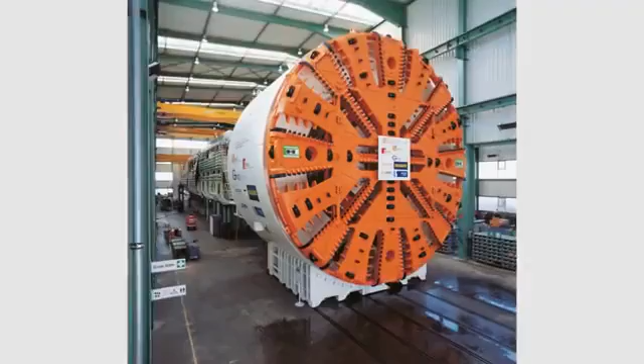The following computer animation shows the way earth pressure balance shields work, taking as an example the Herrenknecht EPB shield used for a subway construction project in Barcelona.

As part of the extension of Subway Line 9, the machine S442 excavates a 3.6-kilometer-long section between the subway stations Gornal and Zona Universitaria.

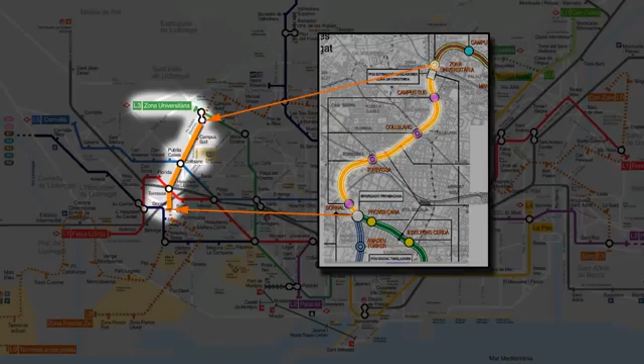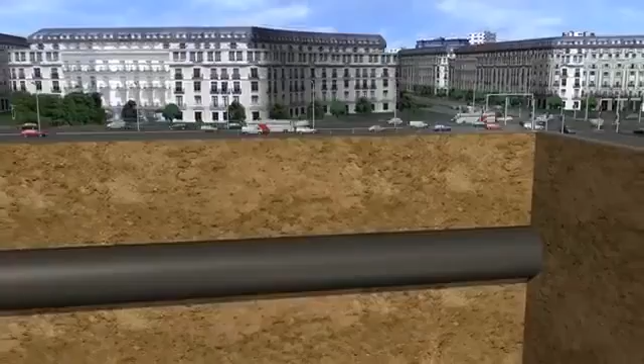The tunnel route crosses beneath Barcelona's historic city center, densely populated residential areas, and roads. In order to avoid any damage to the sensitive buildings, subsidence, heave, and vibrations must be avoided at all costs. In addition, the impact on traffic above ground must remain as small as possible.

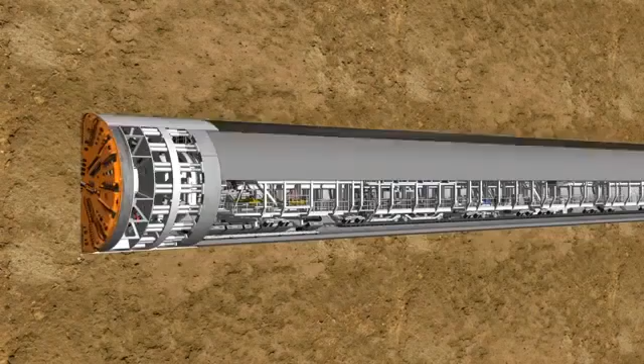The S442 is a classic EPB machine with an outer diameter of 12.06 meters and a total length of 95 meters.

With its rotating cutting wheel, the tunneling machine breaks the material from the tunnel face. The material is then transferred to the belt conveyor system in the rear of the shield via a screw conveyor, while the hydraulic cylinders press the machine forward continuously.

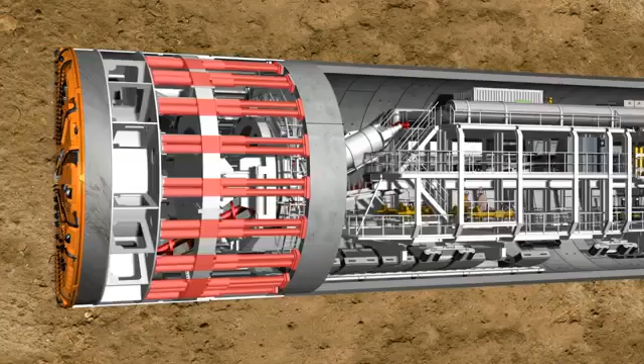The reinforced concrete segments, known as lining segments, are installed under the protection of the shield skin. When the ring building has been completed, the machine can push itself against the new tunnel ring and drill further into the soil.

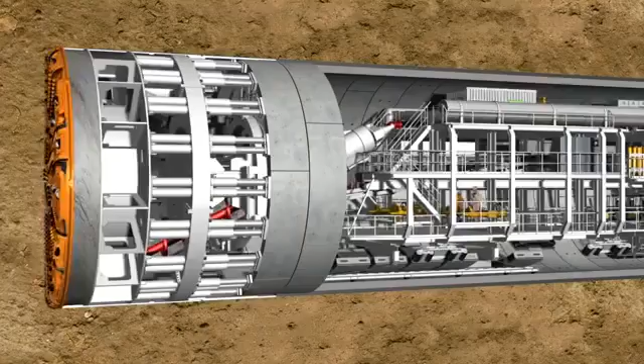The 83-meter-long backup accommodates all logistic facilities necessary for the operation of the overall system.

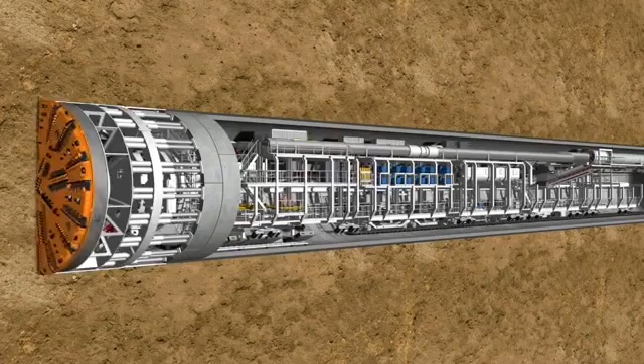The working method of an EPB shield is basically made up of two phases: the tunneling phase and the ring building phase.

During the tunneling phase, the cutting wheel, which rotates at a speed of up to 2.7 revolutions per minute, is pressed against the tunnel face with a pressure of up to 400 bar by means of hydraulic cylinders.

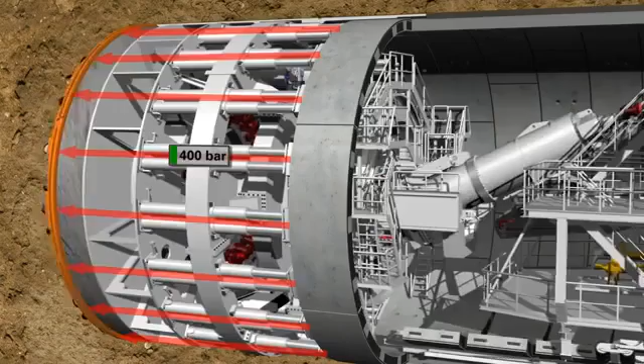24 hydraulic motors drive the cutting wheel via a gear rim, developing a drilling torque of up to 38,000 kilonewton meters.

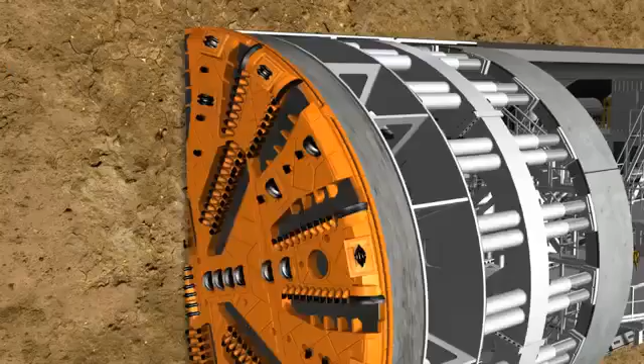Under this high pressure, the disc cutters and cutting knives made of high-strength steel loosen the material at the tunnel face.

If necessary, the soil can be conditioned with water, bentonite, or foam using the injection systems located on the backup.

With the help of nozzles integrated into the cutting wheel, the corresponding conditioning medium is injected into the soil, which is pressed into the excavation chamber by the existing earth and groundwater pressure.

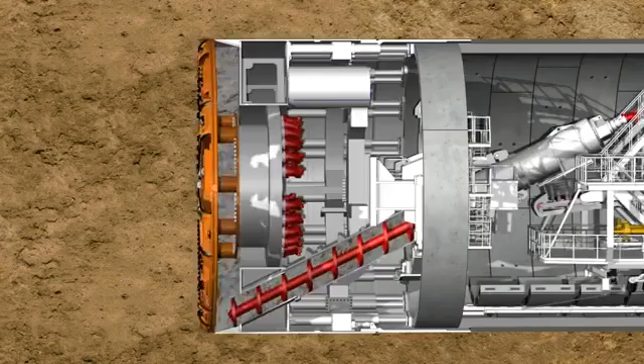For shield tunneling in non-stable soils, a loss in stability at the tunnel face is compensated by creating a support pressure. In the case of the earth pressure balance shield, the soil which was excavated by the cutting wheel is used to support the tunnel face.

In order to reach a state of equilibrium, the support pressure is transferred by the hydraulic cylinders via the bulkhead to the soil, which avoids an uncontrolled penetration.

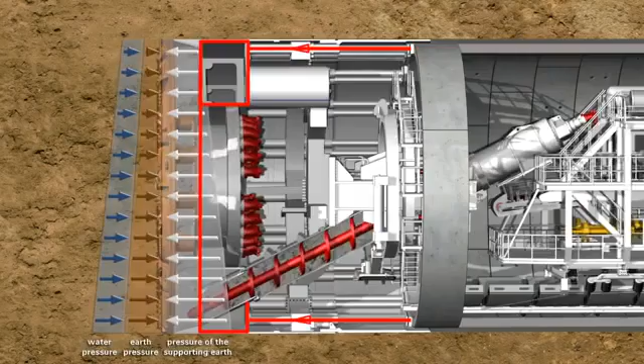The soil prepared in this way can now be transported from the invert area of the excavation chamber to a belt conveyor by a screw conveyor.

The screw conveyor is driven by two hydraulic motors which have a power of up to 400 kilowatts.

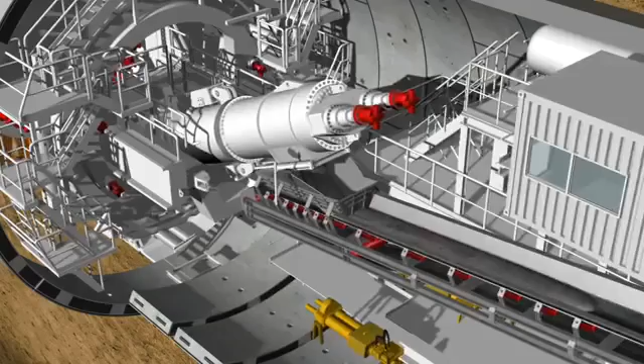The quantity of the soil taken from the excavation chamber is regulated by the screw conveyor's rotational speed, which is matched to the advance speed.

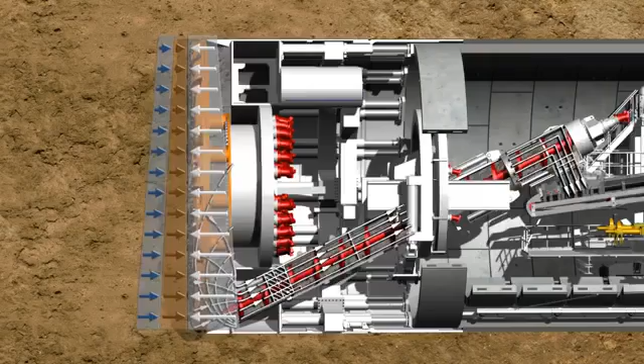The aim is to maintain a state of equilibrium between the quantity of soil removed by the screw conveyor and the quantity of soil accumulated from the shield's tunneling process. This guarantees optimum support for the tunnel face.

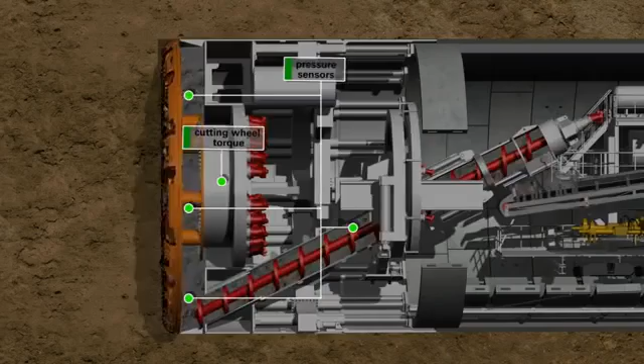The system must be able to react flexibly to the permanently changing geological conditions. Therefore, the current state is continuously controlled with the help of pressure sensors, by measuring the cutting wheel torque and the screw conveyor torque, and by monitoring the excavated material.

When the tunneling phase is completed, cutting wheel and screw conveyor are stopped. Now the ring building phase starts in the shield area under atmospheric pressure conditions.

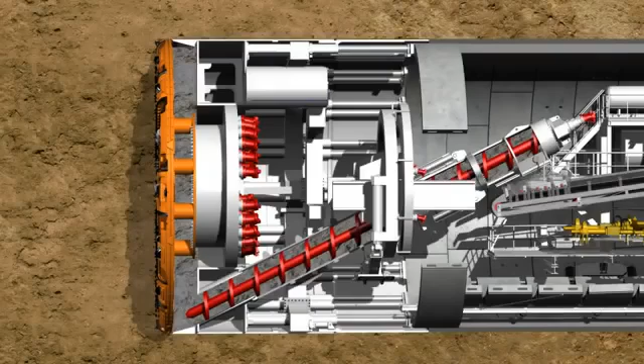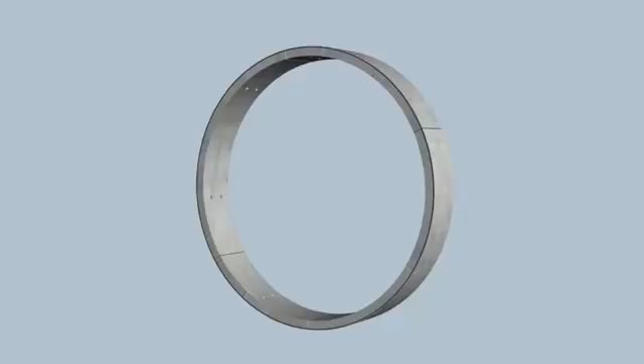A complete tunnel ring consists of several segments, called lining segments. These prefabricated reinforced concrete elements are produced with millimeter precision in a factory which is especially installed above ground for this purpose. Following quality control, they are then transported into the tunnel by mine cars.

In the front section of the backup, the lining segments are lifted individually by a special transfer crane. It lifts them onto the segment feeder which transports the elements to the front of the tunnel.

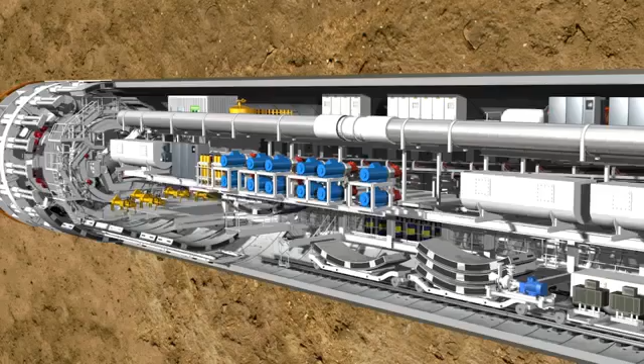Here, the heavy ring segments are picked up and positioned by a hydraulically controlled crane arm, called the erector, using vacuum plates. The erector is installed on two rails and can be moved, rotated, and telescoped.

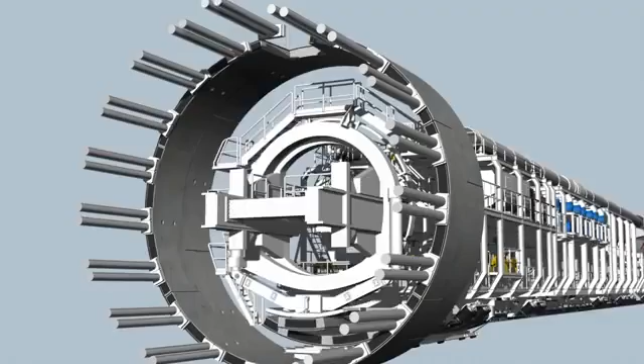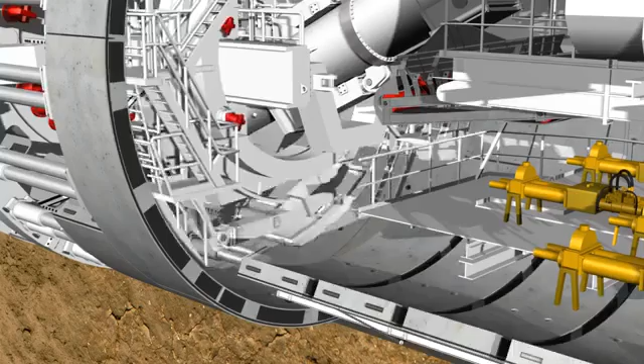Each completed tunnel ring consists of several segments, two lateral elements, and the key segment, which is installed last. The positioning of the segments always follows the same routine. The erector lifts the stone from the segment feeder.

The segment is positioned precisely, holding sight contact next to the previously installed ring, using a remote control. Now the hydraulic cylinders are extended again to secure the segment in its position and to subsequently bolt it into the previous ring.

During this process, machine and tunneling personnel are protected by the shield skin against the earth pressure and any possible groundwater. In this way, the lining segments are installed on each side alternately. The key segment, with its tapered sides, is slotted into position last and distributes the loads in the ring, completing the ring building.

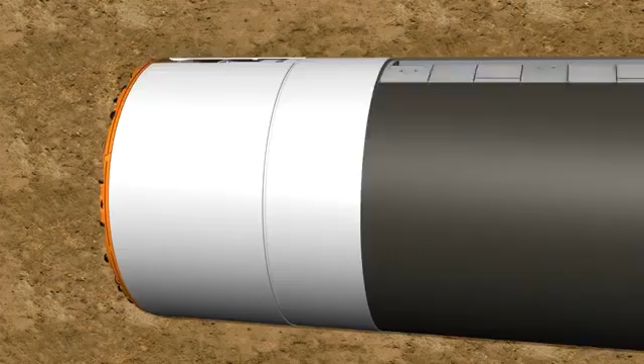The end of the shield, the so-called tail skin, is equipped with a circular tail skin sealing. This provides a seal between the steel structure of the shield machine and the segment ring, which in turn guarantees the necessary sealing between the interior working space and the exterior earth pressure.

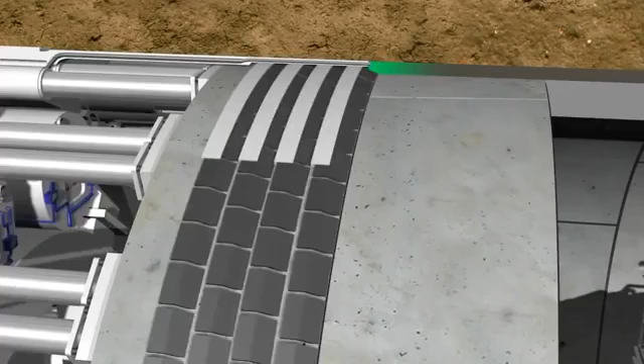The remaining annular gap between the outer side of the lining segments and the soil is continuously filled with grout via injection holes in the tail skin or in the lining segment, in order to provide a bed for the tunnel tube and to stabilize it.

Each individual tunnel ring is constructed in a slightly conical form. This means that curves can be constructed along the tunnel route by changing the installation position.

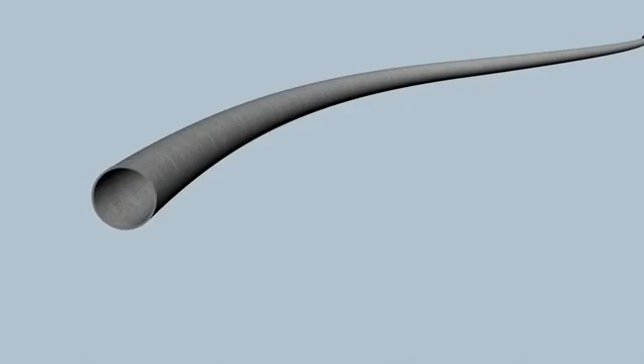A time-lapse clearly shows the two working phases of the TBM. The tunneling phase and the ring building phase alternate continuously. In this way, the tunnel grows ring by ring.

Under optimum conditions, up to 350 meters of tunnel can be constructed in one week. This includes the removal of up to 40,000 cubic meters of excavated material and the installation of far more than 1,000 lining segments.

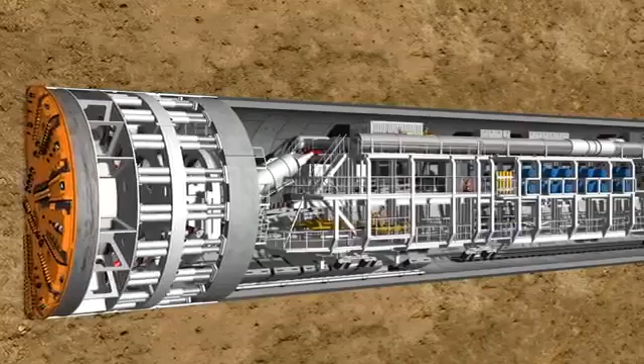Complex logistic solutions are required to deal with such quantities of material. The 83-meter-long backup of the S442 tunnel boring machine accommodates all the facilities required.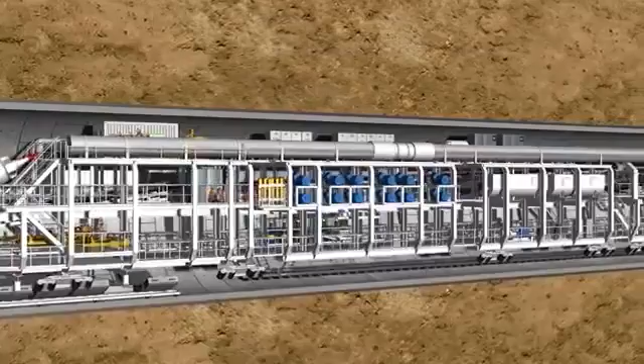With each advance movement of the shield skin, the backup is pulled behind on wheels, which brace against the tunnel wall. Among other things, the steel structure accommodates hydraulic power units, pumps, switch cabinets, ventilation systems, laser instrumentation, and storage containers for soil conditioning agents.

In addition, logistic solutions for the delivery of the lining segments and the removal of the excavated material are located here.

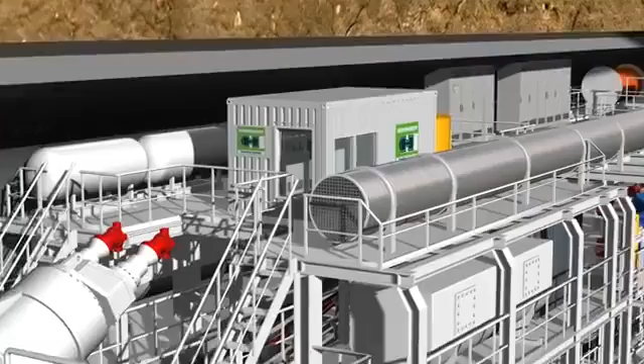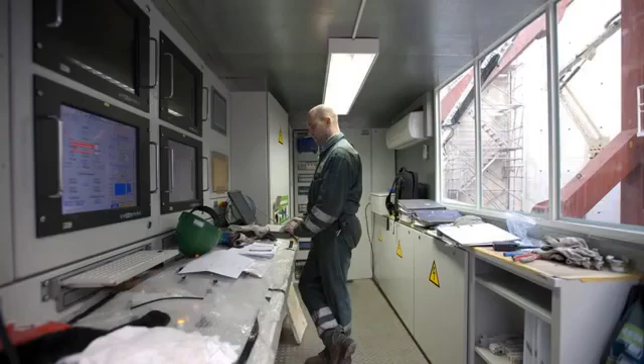All important data and up-to-date tunneling parameters are gathered together in the central control cabin. There, they are visualized on monitors and made available to the machine operator, who can monitor the largely automated process and intervene if necessary.

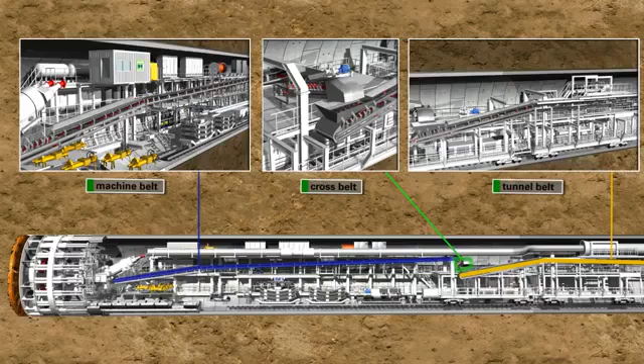In the case of EPB machines, the excavated material is mostly removed by belt conveyors. The core components of such systems are the machine belt, the cross belt, and the tunnel belt, which can measure up to 30 kilometers. The machine belt and the cross belt are two separate short conveyors which are permanently installed on the tunnel boring machine.

The tunnel belt takes up the excavated material from the cross belt in the backup area and transports it along the total tunnel section to the launch shaft.

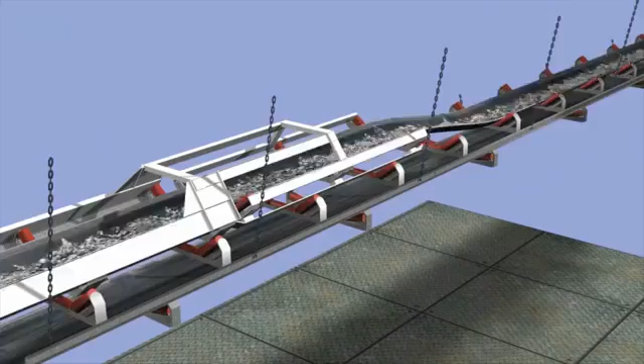The front section of the tunnel belt is also permanently mounted on the backup. The rear part is statically mounted on the tunnel wall and is continuously extended during the ring building phases to match the growing conveyor distance.

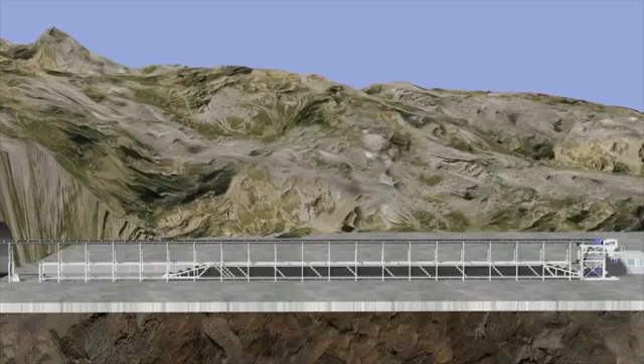In order to compensate for the increase in the conveying distance, a special belt storage system is installed at the launch shaft, which releases the extension of the tunnel belt as required.

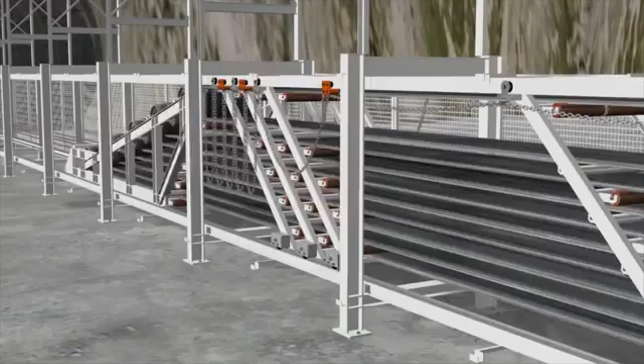The cutting tools must be maintained or replaced in regular intervals, depending on the hardness and abrasiveness of the geology. Sensors are attached at the tips of some tools, which trigger an alarm in the control cabin when a certain degree of wear is reached.

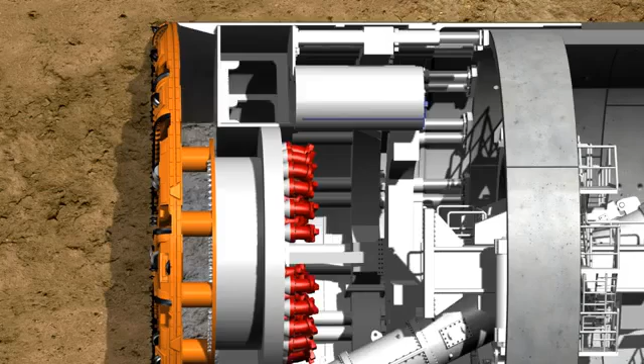If a tool must be replaced, the excavation chamber is partially emptied. At the same time, the cavity in the chamber is supplied with compressed air, if necessary, to stabilize the tunnel face. Then the excavation chamber can be accessed through a manlock to carry out maintenance work or to replace tools.

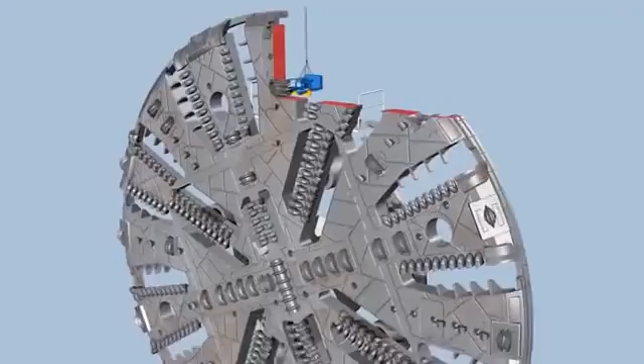A disc cutter is exchanged in three steps. Initially, the quick-release fasteners are loosened. Subsequently, the disc cutter is pulled out of its support with a special tool and, in a third step, replaced by a new one.

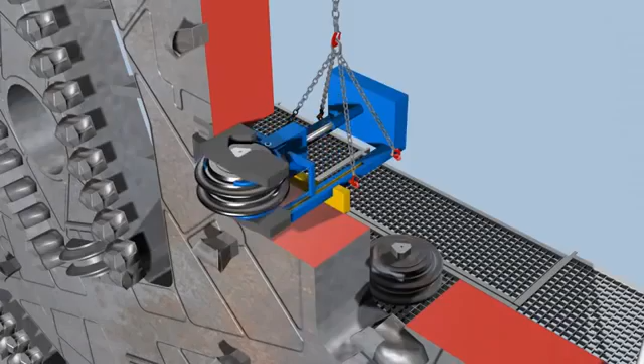Traditionally, earth pressure balance shields made by Herrenknecht are in their element in cohesive soils consisting of clay and silt with low water permeability. Moreover, loose soils consisting of sand and gravel and unstable rock can also be successfully mastered with the EPB technology.